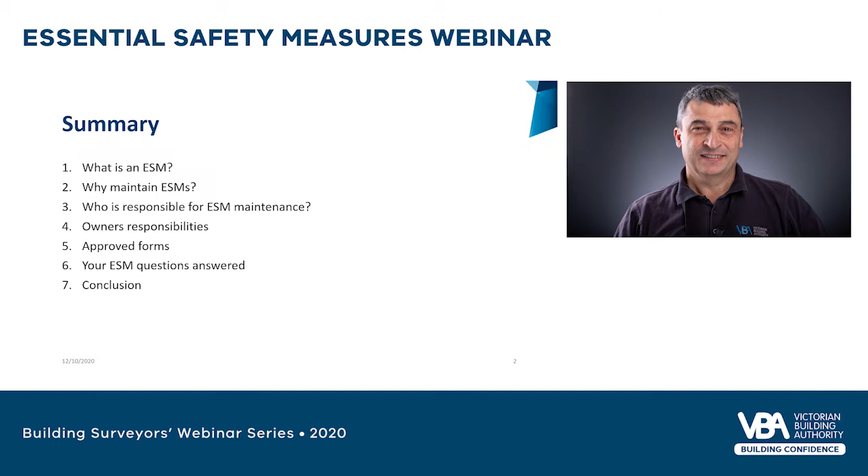What is an essential safety measure? An essential safety measure is a measure required under the Building Act or regulations for the safety of persons and includes the measures specified in Schedule 8 of the building regulations. These include measures such as emergency lights, exit signs, and fire detection systems and the like.

Since the 1st of July 1994, ESMs were specified on occupancy permits and maintenance determinations. Occupancy permits and maintenance determinations which list ESMs must also specify the minimum level of maintenance for the ESMs listed. For pre-1994 buildings, ESMs must be maintained in a state which enables the ESM to fulfil its purpose.

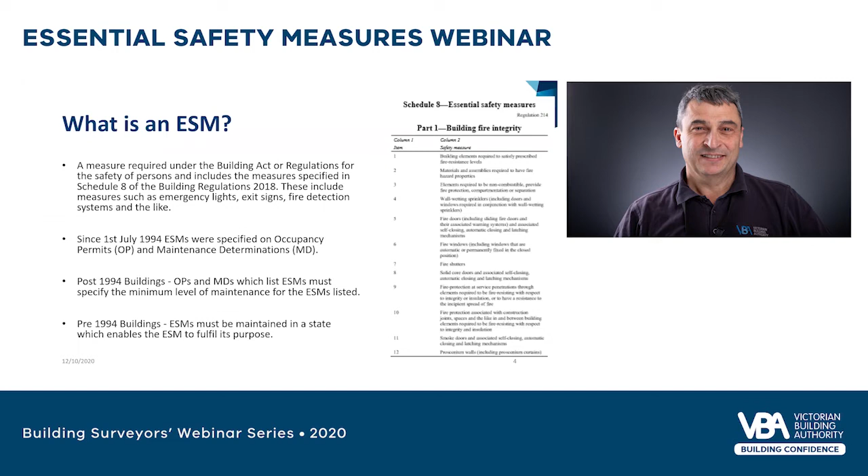Why maintain ESMs? The underlying principle is community safety, and it's also to maintain the level of safety as it existed on the day that it was approved. ESM maintenance is a mandatory requirement for Class 1B to Class 9 buildings, and this requirement is mostly contained in Part 15 of the building regulations.

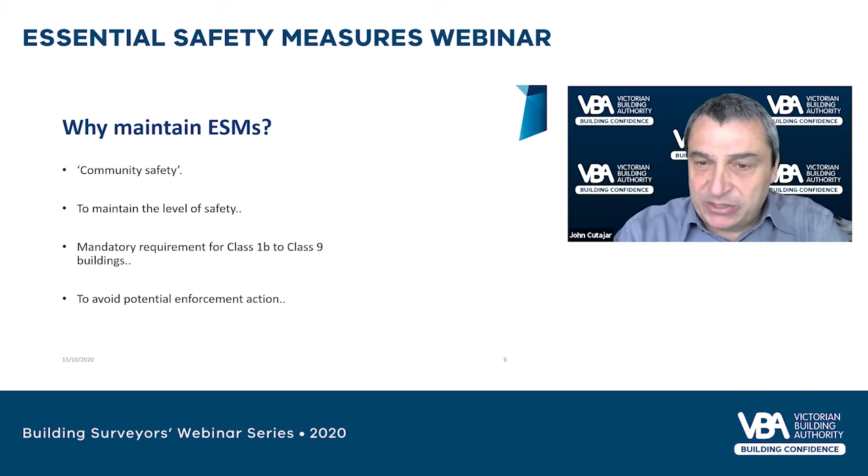ESM maintenance can also avoid potential enforcement action, which could be in the form of infringement notices or prosecution, where penalties of over $35,000 can apply to an individual and over $245,000 can apply to companies.

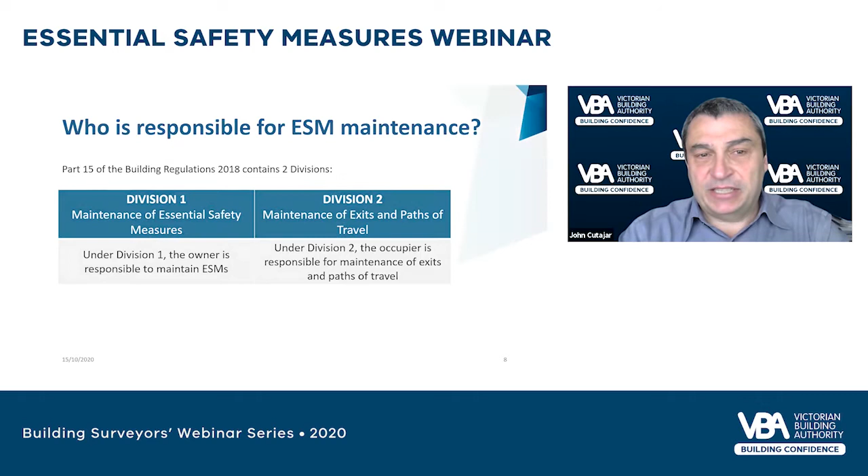Who is responsible for ESM maintenance? Part 15 of the building regulations contains two divisions. Division 1 relates to maintenance of essential safety measures. Under Division 1, the owner is responsible to maintain essential safety measures. Division 2 relates to maintenance of exits and paths of travel. Under Division 2, the occupier is responsible to maintain exits and paths of travel.

Owner's responsibilities. Owners are required to take all reasonable steps to ensure that each ESM is operating and has been maintained in a state that enables the ESM to fulfill its purpose and has been inspected, tested and maintained in accordance with the Building Act and regulations.

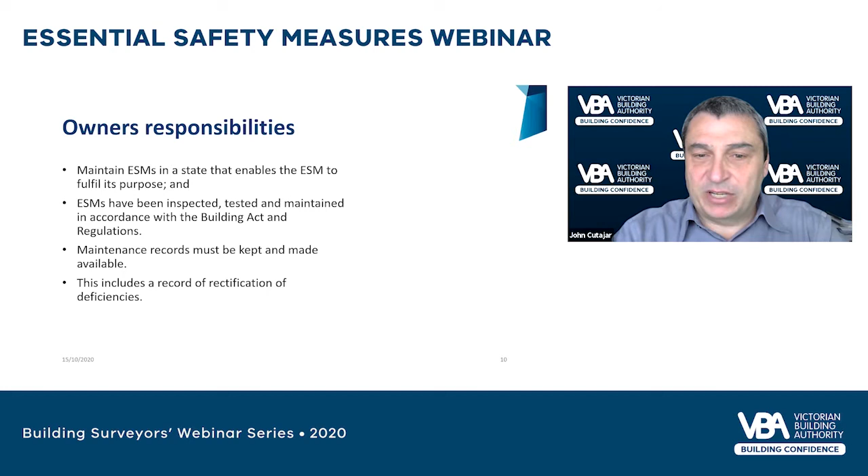Owners are also required to keep maintenance records and make them available, and this includes a record of rectification of deficiencies. The flow on from this is that ESM contractors should be providing the owner with a copy of maintenance and rectification records.

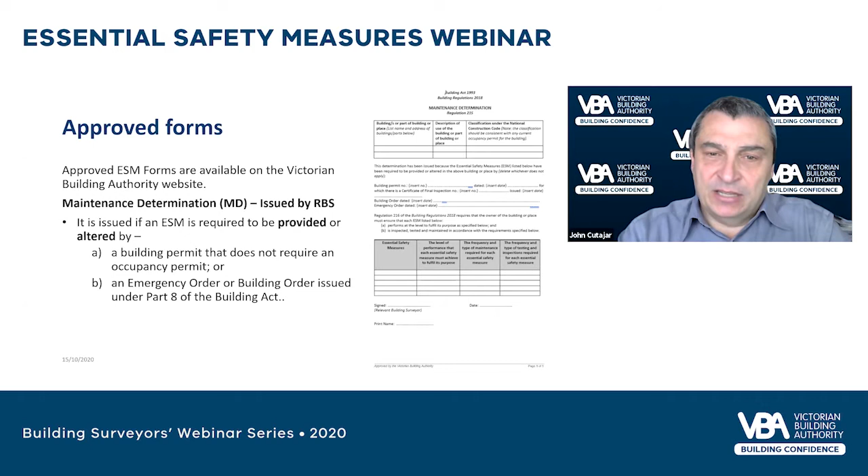Approved forms. Approved ESM forms are available on the VBA website. The first of the approved ESM forms is a maintenance determination. This gets issued by the relevant building surveyor. A maintenance determination is issued if an essential safety measure is required to be provided or altered by a building permit that does not require an occupancy permit, or an emergency order or building order issued under Part 8 of the Act. The maintenance determination must specify the maintenance requirements that were provided or altered by the subject building work.

The next of the approved ESM forms is a maintenance schedule. The maintenance schedule gets issued by a building surveyor. The maintenance schedule lists ESMs provided for a building in one consolidated location. This requires the building surveyor to list ESMs specified in a maintenance schedule, including their maintenance requirements. A maintenance schedule must be issued when a maintenance determination is issued or if an occupancy permit under Regulation 194 is issued.

Alternatively, owners can engage a building surveyor to provide a maintenance schedule identifying all ESMs that exist for a building, including those not specified in an occupancy permit or maintenance determination. And these would be the pre-1994 measures that exist. This is particularly useful for owners of pre-1994 buildings, as ESMs are not listed on the occupancy permits for pre-1994 buildings. When listing ESMs in a maintenance schedule, the ESMs and maintenance requirements must not be changed from what's specified in the occupancy permit or maintenance determination.

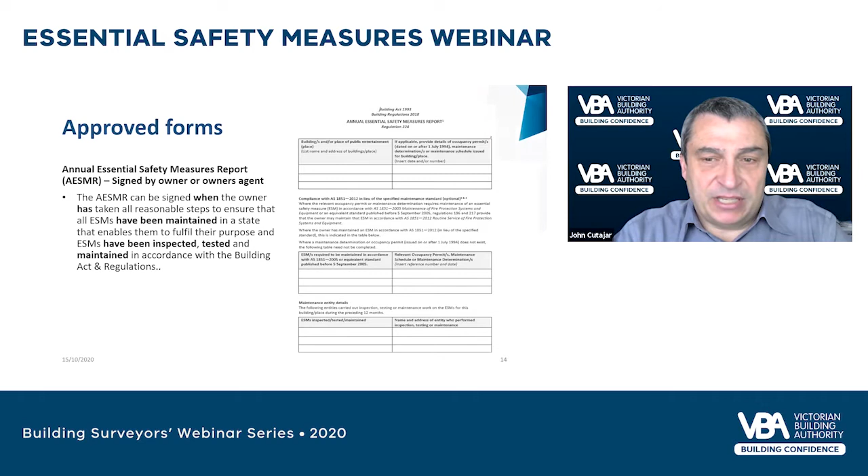Regulation 223 does not allow an annual essential safety measures report to be completed with conditions such as "the following are required to be maintained." This would suggest that the ESMs have not been maintained. Doing so could lead to enforcement action such as infringement notices being issued. ESM deficiencies should be measured against the installation level of performance specified on the occupancy permit or maintenance determination.

Your ESM questions answered. The following are some of the questions that the VBA have been requested to comment on. The first question relates to maintenance schedules. What does the building surveyor do when he or she is engaged to prepare a voluntary maintenance schedule at the request of an owner under Regulation 220 and the owner does not provide the documents specified in Regulation 219, being a copy of all maintenance determinations, maintenance schedules, and annual essential safety measure reports?

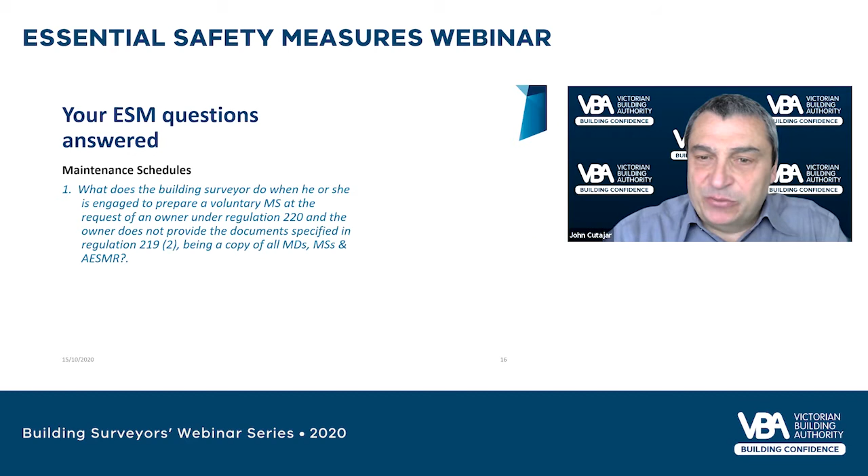As a maintenance schedule under Regulation 220 is a voluntary provision, the building surveyor should not provide the Regulation 220 maintenance schedule until the owner provides the documents required.

The next question relates to maintenance schedules. When a building surveyor is preparing a maintenance schedule, Regulation 222 specifies that the ESMs must be listed in chronological order according to the date on which each ESM was required to be provided. How is this done for pre-1994 buildings?

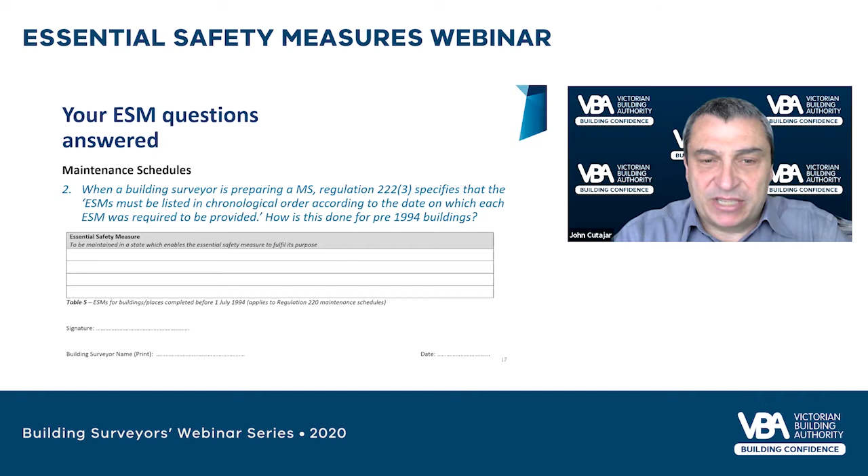The reference to the date on which each ESM was required to be provided relates to the date of the occupancy permit or maintenance determination. For pre-1994 buildings, the ESMs are listed in the pre-1994 table within the maintenance schedule without a need for a specific date to be expressed. This slide shows a cut and paste of the pre-1994 table contained within the maintenance schedule. The information to be inserted within this table is to list the pre-1994 measures that exist for the building or place.

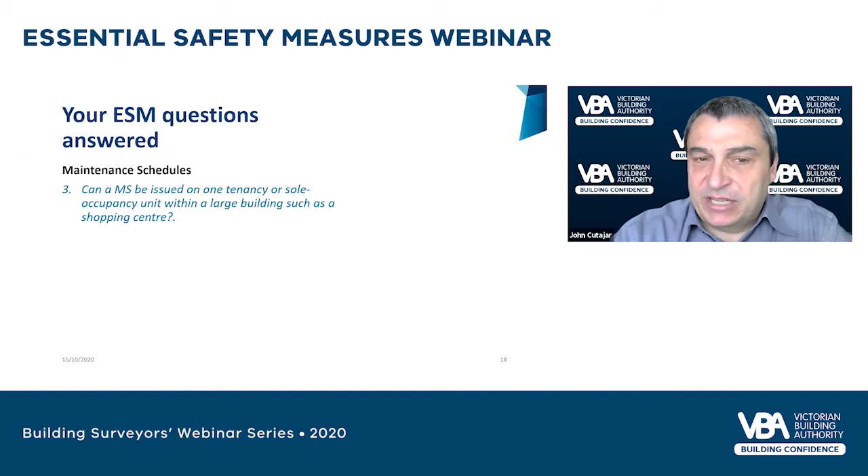The next question relates to maintenance schedules. Can a maintenance schedule be issued on one tenancy or sole occupancy unit within a large building, such as a shopping centre? Regulation 218 specifies that a maintenance schedule relates to a building or place of public entertainment. So in answer to this question, Regulation 218 requires the maintenance schedule to be issued on the building, being the entire building.

The next question relates to annual essential safety measure reports. Can multiple different buildings or parts of buildings on the same allotment be specified on one annual essential safety measures report? Examples of this would be as follows: a multi-storey residential apartment building or a hospital site that contains multiple different buildings.

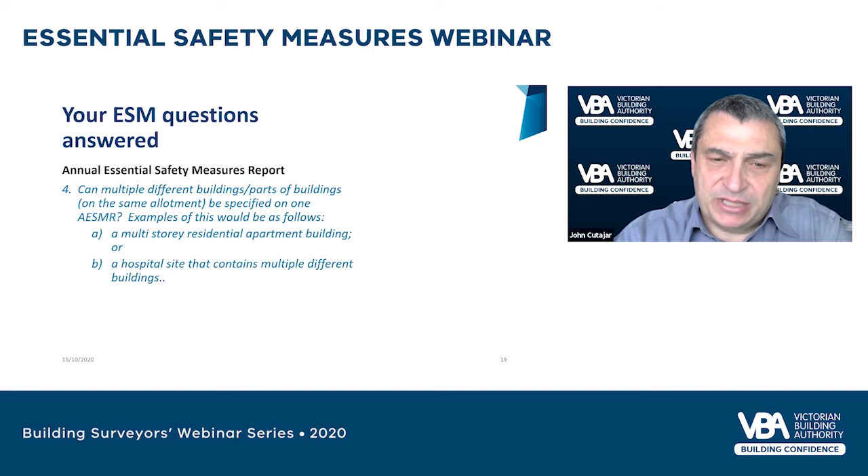If the building is a multi-storey residential apartment building, the annual essential safety measures report can be issued for combined parts of the building owned by separate entities, or an annual essential safety measures report can be issued for each part of the building in separate ownership. If the site is a hospital, for example, and it contains multiple buildings on one site, then a separate annual essential safety measures report should apply for each separate building.

Next question relates to who can carry out ESM inspection and maintenance functions. ESM inspection and maintenance functions should be undertaken by competent persons. Australian Standard 1851 defines a competent person as a person who has acquired through training, qualification, experience, or a combination of these, the knowledge and skill enabling them to correctly perform the required task. In addition, persons carrying out routine servicing of fire hose reel systems, fire hydrant systems, sprinkler systems, and air handling systems are required to be a licensed plumber whose licensing authorises the carrying out of routine servicing of these ESMs.

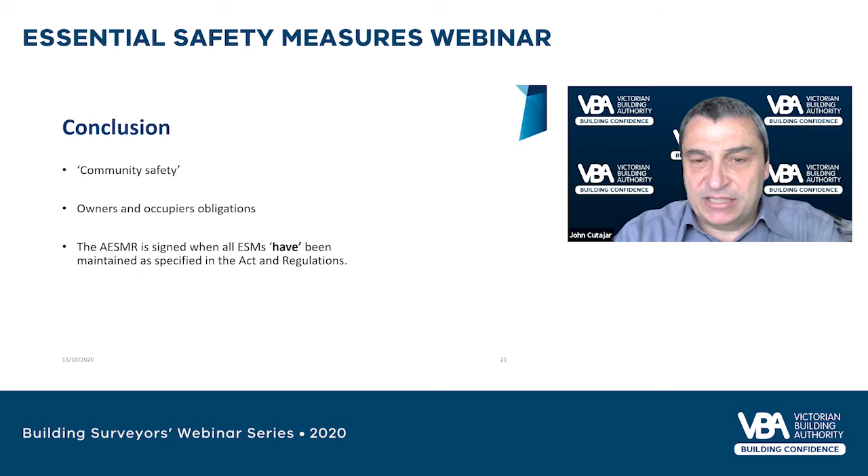So in conclusion, the principle behind ESM maintenance is community safety. Owners have a legal obligation to maintain ESMs, and occupiers are required to maintain exits and paths of travel. The annual Essential Safety Measures report is signed when all ESMs have been maintained as specified by the Act and regulations.

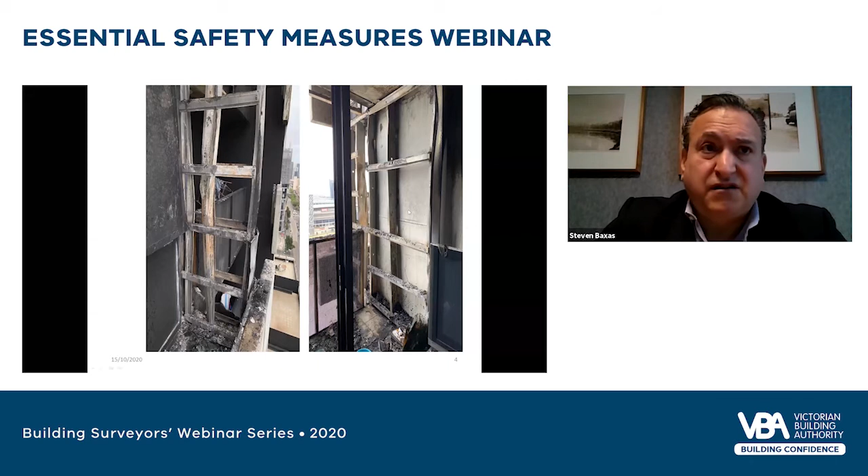The image to the left, you can see an awning window about this position, I'm using my mouse, which is a bedroom window, was slightly ajar, and you can see the burnt fin to the right of it. The image to the right, you can see the balcony where the fire first started, and again you can see that the wall of that balcony was clad in ACP as well.

So this is a situation on site. So the building was completely evacuated of its 1,100 occupants. The building suffered damage from level 21 to 27, which is mainly fire and water damage, and water damage from level 27 all the way down to level 14. The building also lost all power.

So as the MBS, I'm responsible to ensure that a building is safe before it can be reoccupied. So post-fire, I heard from many occupants that they didn't hear alarms. And I also heard from the fire brigade who expressed concern about the state of the emergency pumps.

So at the same time, I was receiving multiple calls from a relief centre that we had set up at the town hall, which was housing most of these occupants, about when the building could be reoccupied. So at that point, I concluded that the building was in a state where it couldn't be occupied as it was. So what I decided to do in order to satisfy myself was a comprehensive essential safety measures audit.

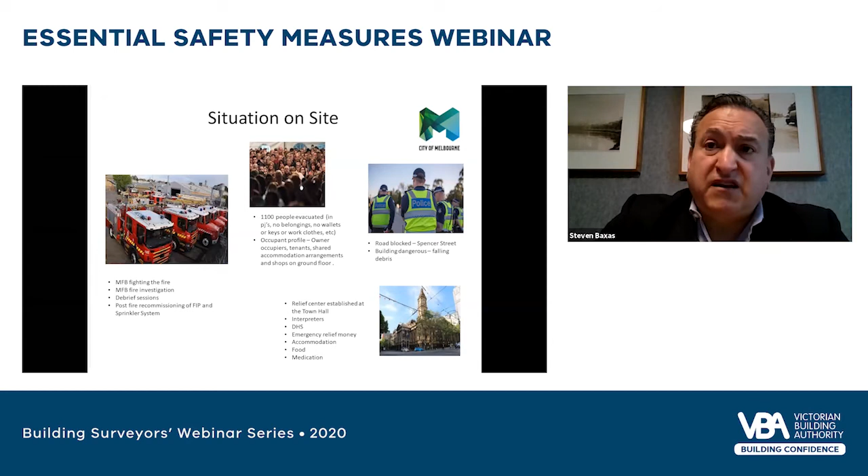In order to do this properly, I engaged experts, as you do. I used 10 of my own staff, and I engaged Jonathan Barnett and his team at Basic Expert to assist with a very comprehensive audit. The audit took several days, and I'm now going to talk about what we found.

So the first thing that we did was download information from the fire indicator panel, and we put this little spreadsheet together. So what we found, that the sprinkler in apartment 2209 went off at 5:43 a.m. in the morning. So the boxes with the red writing are all GFA sprinkler activation. So the second was 13 minutes later. The third sprinkler head went off 3 minutes after that.

The fourth went off 2 minutes after that, but interestingly, it was actually the level below the level of fire origin. So the fire was spreading up and was also spreading down at the same time. And the fifth was 2 minutes after that. The fire brigade arrived at the site 7 minutes after the GFA, and you can see that in the timeline.

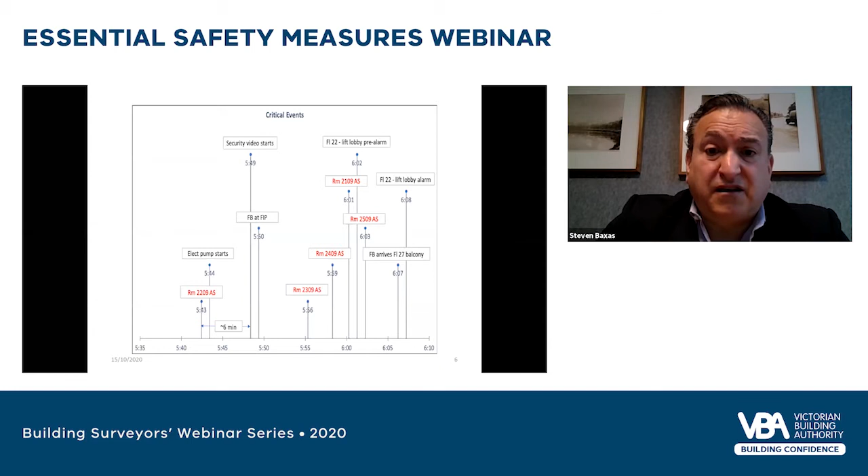They were on level 27, above where they thought the fire was, 17 minutes after they arrived on site, which was absolutely incredible. The MFB were unable to use lifts as they didn't operate as they were supposed to. However, they still managed to get to level 27 and stop the fire from progressing any further. Their quick response to the fire stopped it from progressing to the top of the building, remembering there were 41 levels in this building.

So essential safety measures. ESMs are critical in ensuring that both people get out of a building safely and that the fire brigade get there quickly and get early warning to a fire. So in order to carry out a full and proper ESM audit, we first had to understand the building, and this is the hardest part. These days, buildings are complex and they are hardly ever DTS.

So in order to understand the building's fire systems and how they worked, we first had to understand the fire engineering report for this building. The building was equipped with a specifically designed smoke alarm and detection system, which I'll talk in more detail about later, a corridor pressurization system, an enhanced sprinkler system with 2 sprinkler circuits on each level. We had one for apartment spaces and one for common spaces.

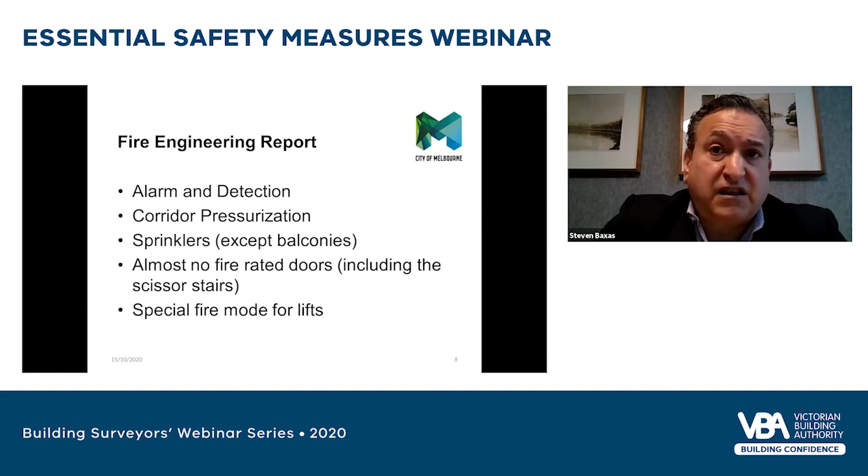Both had flow switches connected back to the FIP. So the FIP knew where a fire was and whether it was in a public space or whether it was in an apartment. We had almost no fire doors, and we had a special fire mode for lifts to assist in the evacuation of occupants. On GFA, the lifts would go to the fire affected floor, then the floor above, then the floor below to assist with the evacuation of the building. Unfortunately, this wasn't operating properly.

So this is taken straight out of the FER, and this applies to all doors, including apartments and to the 2 stairs. So we had solid core doors only, not fire doors. They were self-closing. They had to be at least 35 millimetres thick. Door frames had to be at least 25 millimetres thick. The rebate in the frame to house the door had to be a minimum of 20 millimetres. The force had to be no more than 110 newtons.

Doors had to be maintained in accordance with Part 11 of the building regs, which were the applicable regulations at the time. The building was 11 years old at the time of the fire. Door closures had to be maintained every 6 months. Apartment doors effectively achieved an FRL of -/60/30 if they complied with these requirements.

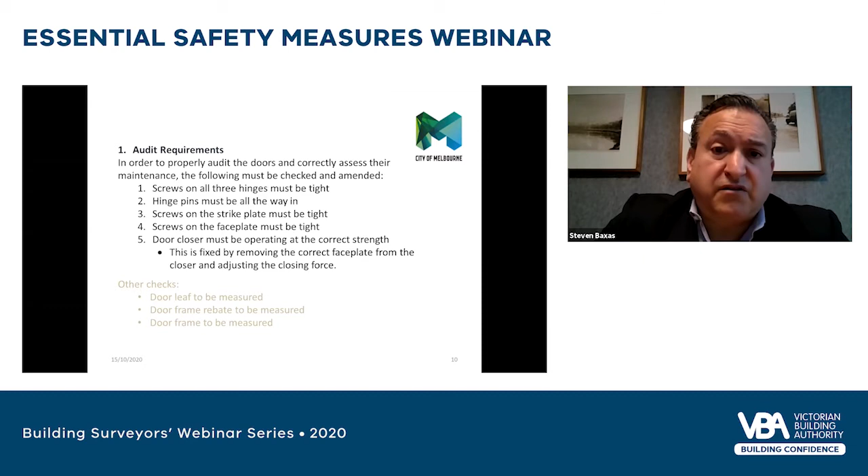So in order to audit the doors, these are the things that we had to look at. We had to check that screws on all 3 hinges were tight. We had to check that pins were all the way in. We had to check that screws on the strike plates were tight. Screws on the faceplate had to also be tight. Door closers had to operate at the correct strength. We needed to measure the door leaf, the rebate, and the door frame itself to make sure that it complied with the FER.

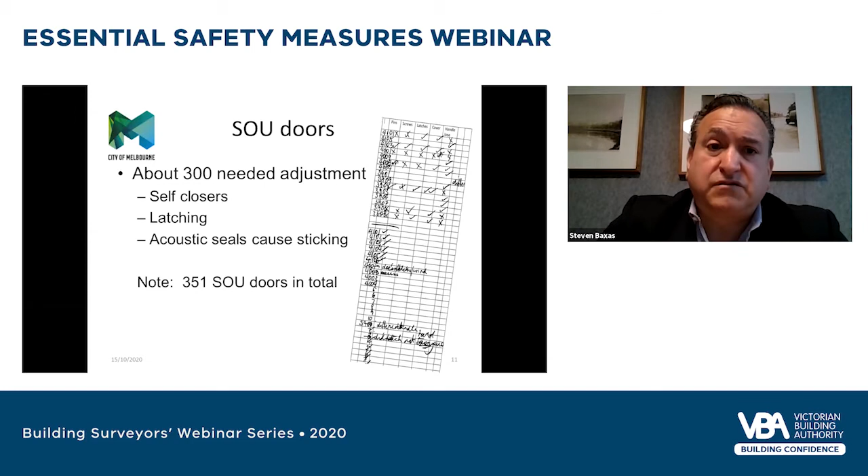So what did we find? We found 300 doors needed adjustment. There were 351 sole occupancy units, and 300 of those doors, and this is just doors to sole occupancy units, needed some adjustment. It was either self-closers, latches, or acoustic seals that were sticking and were stopping the door from closing properly.

I'm going to talk a little bit about the smoke alarm and detection system now. The building had an AS3786 detector system on AS1670 sounder basis in every living space and every bedroom in the entire building. So on activation of a general fire alarm, by either a sprinkler head or a detector in the corridor or public space, every sounder in every room in every apartment would sound. That was what the design required. This would occur on the fire affected floor, the floor above and the floor below.

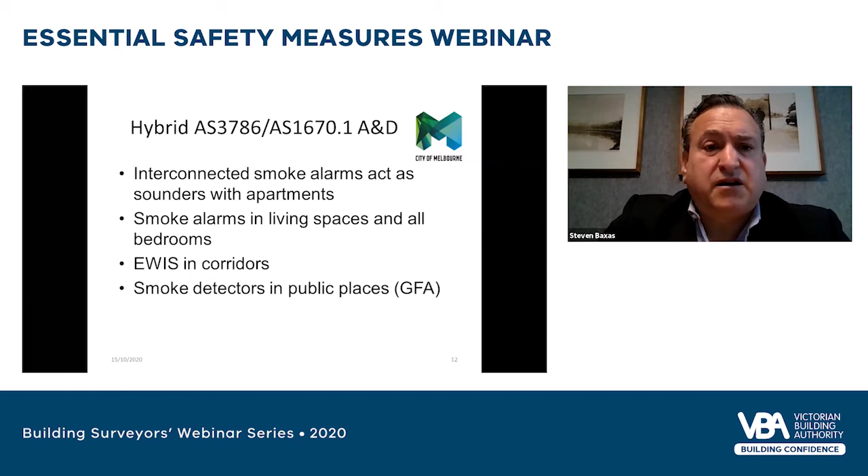And this was to give people that were immediately in danger the earliest possible warning so they could evacuate the building. Smoke alarms acted both as local alarms within each apartment, but also as sounders when a general fire alarm went off. There was also an EWIS system in the corridor. So this is a really unusual design, and it took us several days to understand how the building worked. There was one way information coming from the FIP on activation of GFA, and those smoke alarms within apartments would act as sounders.

So what did we find? When we tested all the smoke detectors in SOUs, we found that 66 apartments either had no smoke alarms at all, or the smoke alarms had been covered or somehow tampered with. As the building was 11 years old at the time of the fire, the owners corporation thought they were doing the right thing when they advised owners to replace all their detectors because the building was more than 10 years old and those detectors had expired, and they were 3786 detectors.

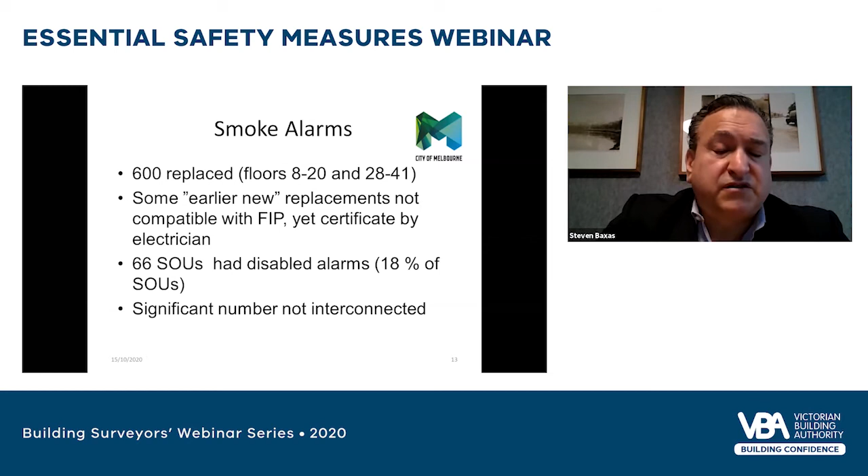This resulted in smoke alarms being replaced with incompatible alarms, which meant that they failed to operate under general fire alarm because they didn't talk to the FIP properly. So in the end, 600 detectors had to be replaced in this building before it could be reoccupied.

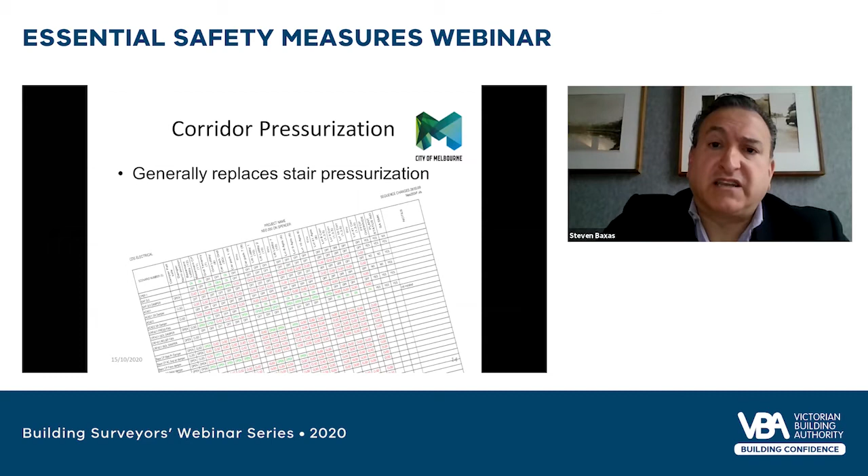We also looked at corridor pressurisation. This was generally in reasonably good condition. We just needed to understand how it worked, and that we didn't have stair pressurisation. The corridor pressurisation acted as both. The doors to the fire isolated stairways had no seals, and the pressurisation from each level actually leaked into the fire isolated stair. So we did a lot of testing, and this is the spreadsheet that we used to capture all that information.

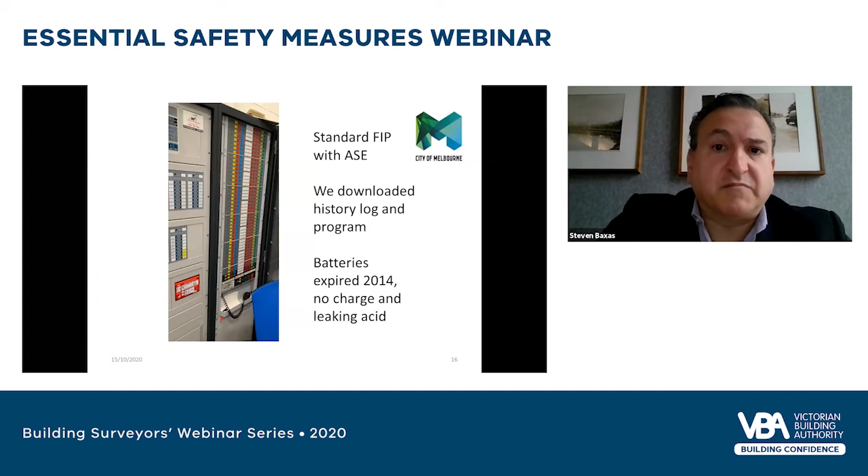So, FIP. So we have a standard FIP with an alarm signalling equipment. And what we found at the base of that were 2 batteries that expired in 2014, and there was no charge, and they were leaking acid.

Pumps, the pump room. So the brigade had some concerns about the pump room. We went into the pump room. What we found is that many gauges were not liquid filled. Pressure switches were sticking. The actual system was pumped up to 2000 kPa, which is well above what it should have been, but this is because all the equipment in the pump room wasn't maintained properly.

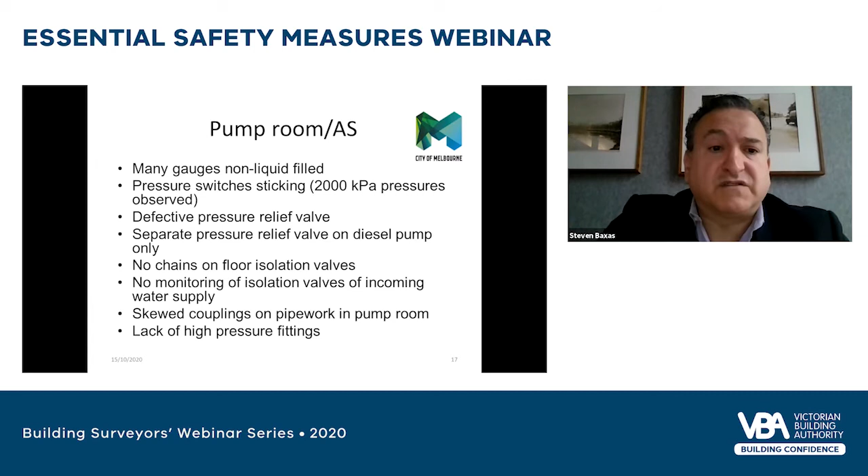We had defective pressure relief valves. We had separate pressure relief valves on the diesel pump only. We had no chains around isolation valves, no monitoring of isolation valves of incoming water supply. We had skewed couplings on pipe work, and we had a lack of high pressure fittings as well.

AS 1851, this is often a problem that we come across. What do you maintain a building to? Compliance with AS 1851 is not always sufficient. You need to read the FER. Where the FER references, say, AS 1851 2005, or another version, that's the version that you need to comply with.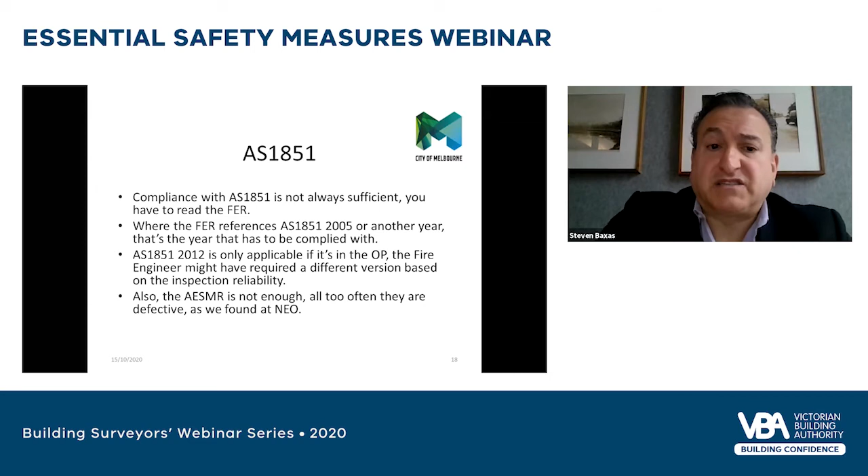AS 1851 2012 is only applicable if the OP requires that. The fire engineer might have relied on a different version based on inspection reliability. Also, annual essential safety measures are just not enough. All too often, they're found to be defective, as we found in this building.

So in conclusion, as the MBS, I can't allow a building to be reoccupied unless it's safe for occupation. This event presented me with a rare and unique opportunity, and that is a completely vacant building. In order to get access to all parts of the building, to carry out the audit, I had to issue orders to have all the doors unlocked in the building. That in itself was somewhat controversial at the time.

So why were the ESMs in this building in such a state? It wasn't because the owners neglected to maintain the building. They spent more than $30,000 a year on maintenance, and the building actually had an up-to-date annual essential safety measures report stuck up on the wall right next to the FIP.

The building was well designed and it was well built. There was a lot of conservatism. The design was conservative and there was lots of redundancy, and that's why no one got hurt despite the lack of maintenance. But how are maintenance contractors meant to know about all these unique features in the building? And that's the question we need to ask ourselves.

Fire engineering reports are almost never available to maintenance personnel, but they're also difficult to read for the average person. So I'm not sure even making that available is the answer. So what do we need to put in place so that owners and maintenance contractors understand how their buildings work? I think that is the challenge moving forward, but it's something that we do need to resolve, as others have touched on and will touch on during this presentation.

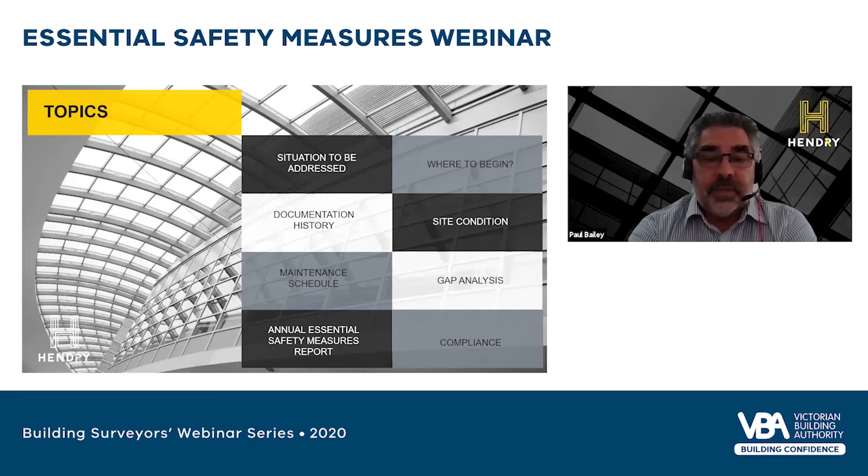Good morning, everybody. So today with my presentation, I'd like to outline how a building surveyor can assist a client with their ESM responsibilities. Certainly it has its challenges, as highlighted with Steve's presentation. So in my presentation, I'll give an overview of the reasons why a private building surveyor may be engaged to assist with the ESMs, and then discuss the various tasks that may need to be undertaken to arrive at a position where the owner is able to sign their annual essential safety measures report and achieve compliance.

There are several reasons that a private building surveyor can be engaged to assist with ESMs, and that could be as a result of enforcement action taken by the council, could be as a consequence of the owner acquiring a new asset or a portfolio of buildings, and within the due diligence period they identified that there were potential issues, so they need a review of those buildings and their maintenance and essential reporting requirements undertaken to ensure that they're up to date as the new owner.

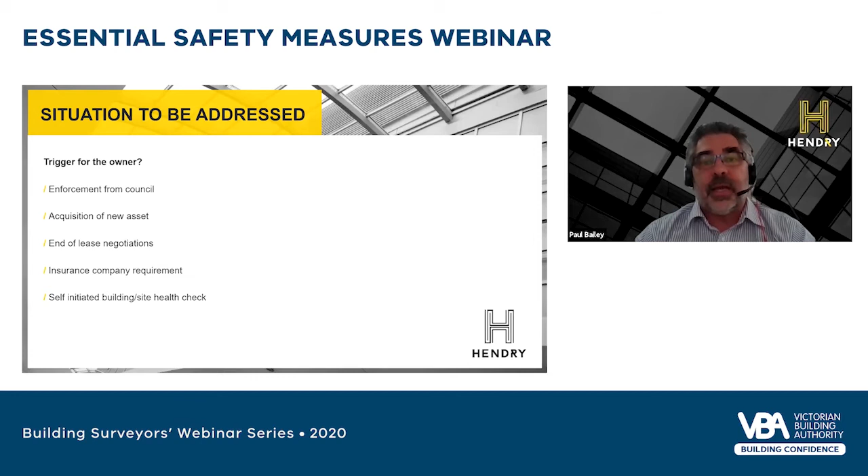Consequently, end of lease negotiations between a tenant and a landlord may require a review either from a tenant's perspective or the landlord's perspective to ensure that whatever their obligations were under the lease were achieved. Insurance companies may require information in relation to ESM maintenance as a result of policy renewals. And alternatively, it could just be a voluntary initiation by the owner of the building to ensure that what they've been doing they believe has been done correctly, and they're not out of sync with any contemporary requirements or provisions. So there are various reasons why a consultant building surveyor can be engaged to assist with ESMs.

However, there are several challenges when looking at assisting a client, because you cannot have a cookie cutter approach, because each building and site is unique. So importantly, you need to understand the building or the site, which will include aspects such as the age of the building, alterations that have happened over the years, the use, how it's expected to be used, how it is being used, understanding of the occupants in the building.

Is it owner occupied? Does it have one tenant? Does it have multiple tenants? Are there subtenants? Because they all play a component in the consideration for assisting the ultimate person with the responsibility, being the owner. That will also include understanding lease conditions. The agreements with landlords and tenants can require tenants to undertake certain activities in relation to maintenance of essential safety measures, and it may or may not be monitored throughout the course of the period of the lease. So it's ensuring that you understand that as well.

And then the reason why you've been engaged will influence the methodology of how you address that reason. And obviously, and I'll come to that later, if it's a consequence of council enforcement action being taken, the solution to that will be different to a client undertaking a voluntary review.

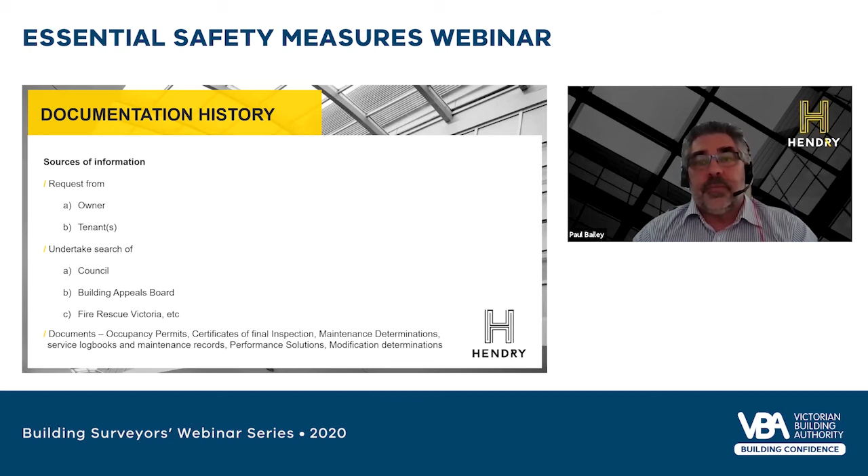As mentioned with the previous speaker, Steven, there are requirements in the regulations to find and locate documents in respect of the site and the building. Those documents can come from various sources, being the owner, tenants, undertaking searches of various authorities such as the council, the Building Appeals Board, Fire Rescue Victoria, CFA, etc. A whole range of documents need to be sourced and reviewed through this process, including occupancy permits, certificates of final inspection, determinations, logbooks, maintenance records, fire engineer reports, Building Appeals Board modifications, alternatives, and getting copies of plans for the building and the site so you can understand what's there.

Once you've gathered the documentation that's available, the next step is to go to site. And again, as each is unique and different, there's no cookie cutter approach to the site inspection. But fundamentally, the purpose of the site inspection is to identify all the essential safety measures that are in the buildings and are on the site. Aspects of the ESMs for site consideration different to the building could be perimeter vehicle access by fire brigade, distance between buildings, clear open space around buildings. So yes, it's a full site analysis, not just looking at buildings.

When on site, you also need to ensure that you look for any other additional documents and records that may not have been provided. Sometimes the only location for logbooks is on site, and that's ensuring that you look in fire panels. Even some of the occupancy permits and plans that you find on site can be very valuable in achieving the ultimate goal. So looking through the site records is important when there as well.

Also, with the document review and information you see from owners and tenants, they should have an expectation of how that building and site is to be used and configured. So on the site visit, it's also critical to ensure that the use of the building is confirmed as being in accordance with the occupancy permit or the tenancy agreements that are in place. And it's not uncommon for that to be different. So it's something that needs to be worked through.

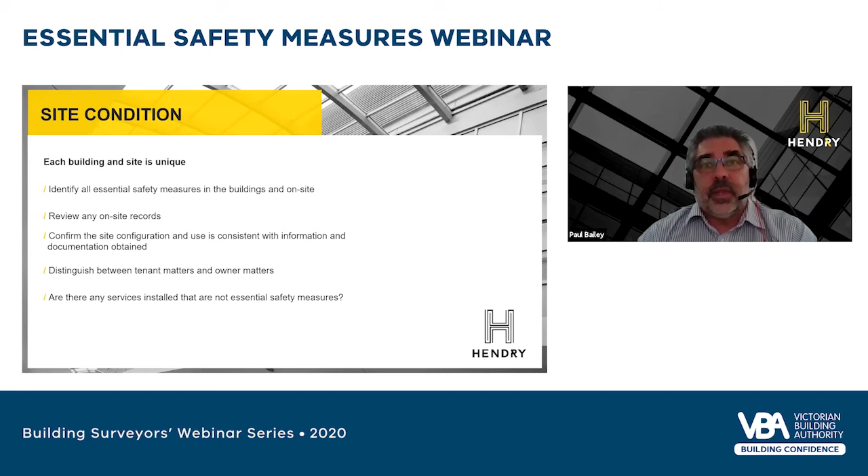And it would be expected that when that tenant leaves the building and they put the building back to the way it was before, they will remove that building service, say that detection system, for example, because it's not an essential safety measure and doesn't need to be retained in the base building.

So once you've done the documentation review and the site visit, the next step is to ensure that there's an appropriate maintenance schedule in place. So if there is an existing maintenance schedule, that needs to be reviewed to ensure it's correct and accurate. If not, it may mean that a new maintenance schedule needs to be prepared.

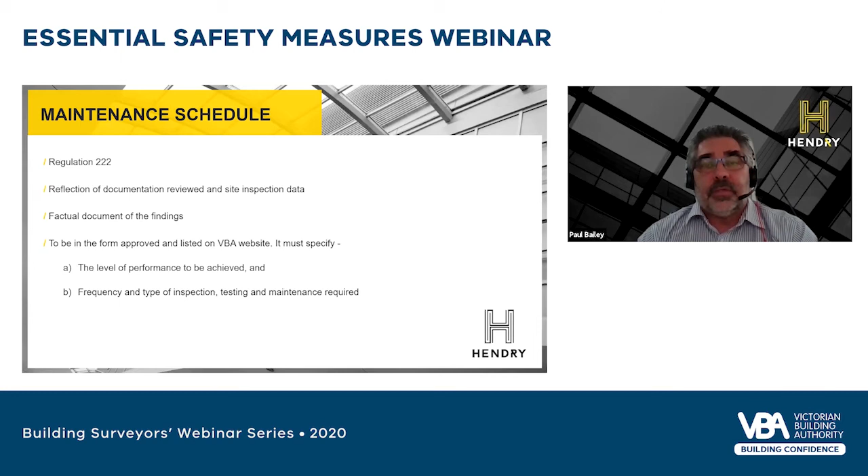It's important to remember that the maintenance schedule is a factual document of the findings of the document review and the site investigations. And it needs to be completed correctly, and it needs to be in the form approved and listed on the VBA website and outline the level of performance to be achieved and the various inspection, testing and maintenance requirements that are applicable to each of the essential safety measures that are in the building.

Once the maintenance schedule is identified and determined, then from that you go back over the documentation that you've found in relation to the maintenance and the testing records and the use of the building to ensure that it's all appropriate. Often you'll find that there are shortfalls, whether it's in the maintenance regime or whether it's in the use of the site or the use of the building.

And that is where a consultant building surveyor then comes into their own in relation to advising the owner and the tenant on the matters that need to be actioned. If the tenant has created the issue, then the owner may not be aware of it, so they will have to have discussions to work that through. And it may include the building surveyor so that they can advise clearly what has to happen.

As with any gaps between the maintenance schedule and the site and the documentation, a methodology to rectify those gaps needs to be worked through with all relevant parties and agree a timing. Now, if the purpose of the exercise is a result of council enforcement action, then obviously it's important that the council are part of this discussion and that the outcome is acceptable to them.

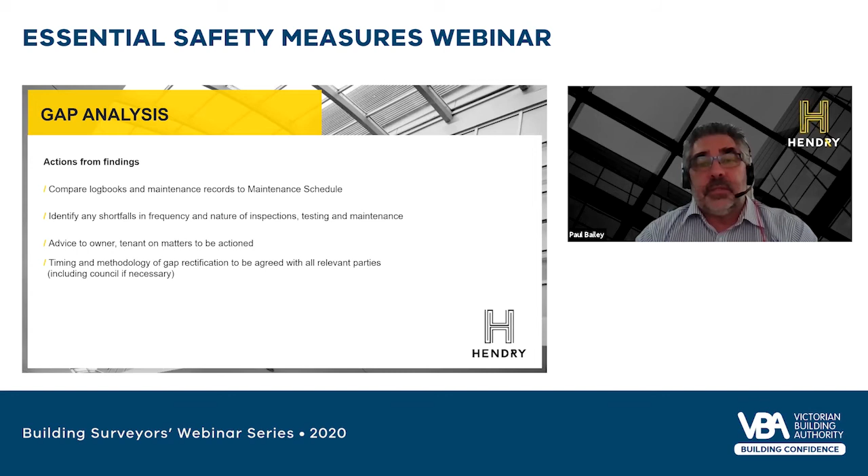Now, the methodology of rectifying it can sometimes get complex as a result of whether it's a tenant issue to be rectified or a landlord issue to be rectified, and also the timing of that may be challenging. So all parties need to be involved, and it may include the insurance company if that's the trigger as well.

At the end of the day, what you want to do is have a maintenance schedule that's complete and accurate. You want to have the gap analysis identified and the works and rectification matters undertaken so that the final step can be realised for the site and the building, and that is the signing of the annual essential safety measures report. However, as previously noted by previous speaker John, until all the inspection, testing and maintenance is completed, that report cannot be signed.

It may be able to be prepared and drafted and waiting to be signed, and particularly in a case where a landlord has acquired a new asset and the previous owner hadn't done the required maintenance, the new landlord, the new client, may not be actually able to sign that document for a period of 12 months or whatever time it needs to go by to ensure that at least the required frequency of maintenance is undertaken in the preceding period.

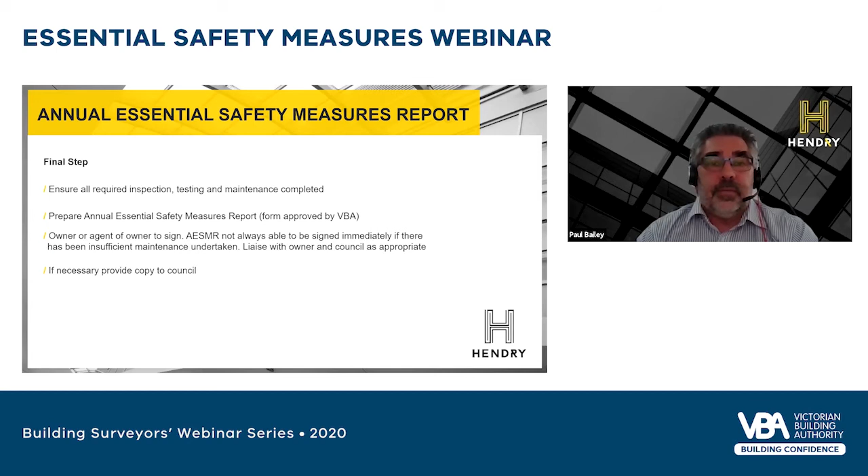Once that's done, then the owner or their agent can sign it, and they can keep it on records as appropriate. Again, if it was a requirement of council enforcement, then it may be appropriate to provide a copy of that either to the council so that they can address that enforcement requirement, or alternatively, the insurance company or any other interested party who has a requirement for it, so they can be provided that document to satisfy their criteria.